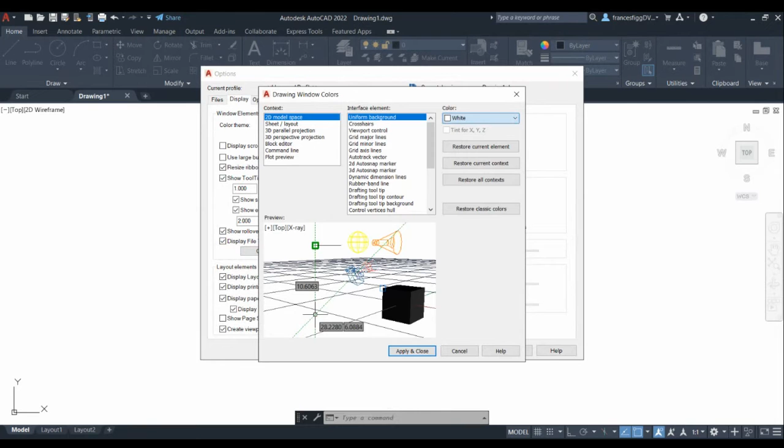I had already changed the background color, so I have that correct. I'm going to get rid of the grid, but if you forget how to do that, type in options and then go to display colors. It usually defaults to black, and I like white. So say apply and close, and you say okay.

The next thing you have to do is type in units, and you want to go from decimal to architectural. If it doesn't show up in feet and inches, you know you're in decimal. So when I go to draw a line, I'll see it in feet and inches.

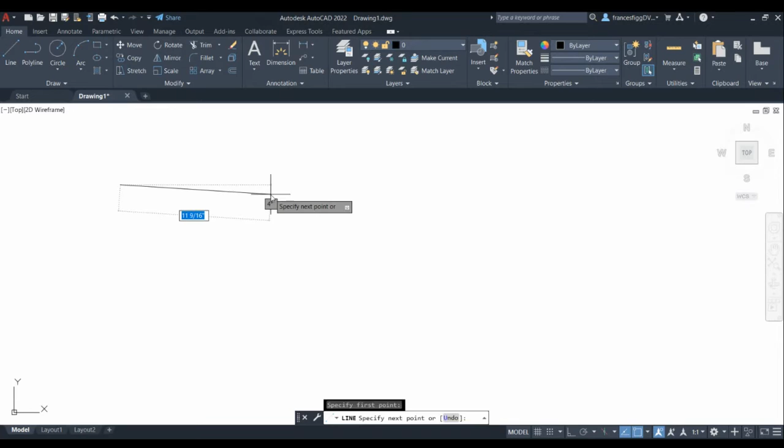Our first exercise is to draw a line that's 12 inches long. I want to make sure my ortho key is on, and I do that by typing the F8 key, or Control F8 if I am on the school computer or laptop. I want it to be 12 inches, so just type in 12. I don't need to write feet or inches; it will recognize it as inches. Then I hit escape, and I can double check my measurements, and I see that I'm 1 foot, which is the same as 12 inches.

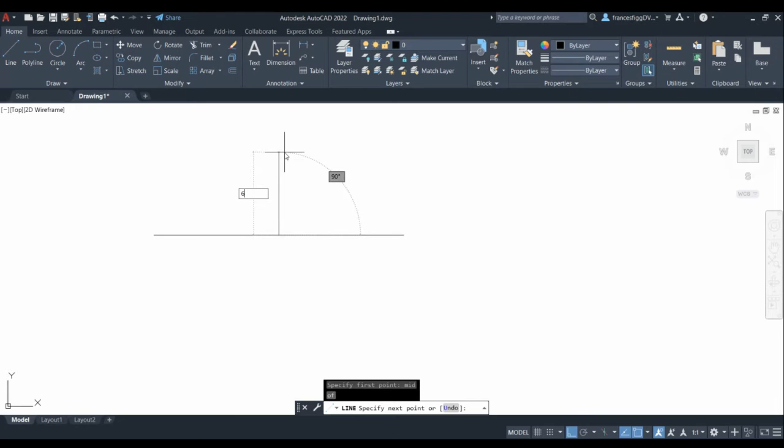Then I want to draw a line from the midpoint, and I have my ortho on. You can also look down here: here's ortho on, here's object snap on, snap to 2D reference point. But I want to do it from the midpoint, so if I type in MID, a triangle will come and I'll know I'm drawing straight from the midpoint. If I go up 6 inches and then hit enter, I've got a line that's 6 inches high. Again, check yourself — you can come check your measurements.

Now I want to extend that line. I want a 6-inch line down at the other end. There are 2 ways to do that. I can draw another line — it will recognize the end point of that 6-inch line, and I can draw 6 inches down. But what I've got is one 12-inch line and two 6-inch lines. I want this to be two 12-inch lines, so I can highlight those and type in join. And join — I've got two 12-inch lines.

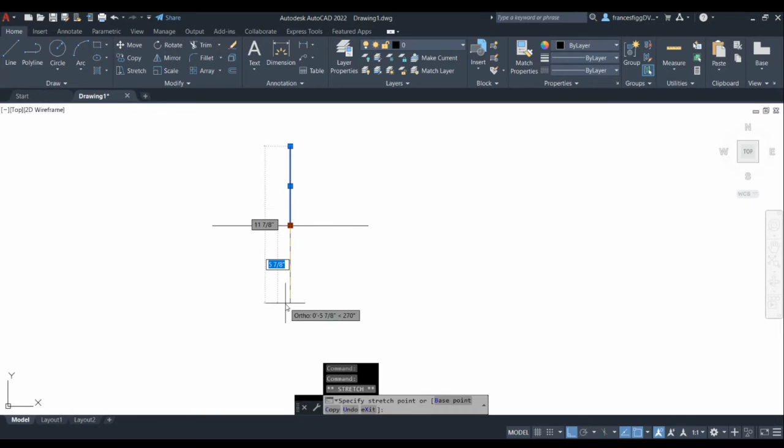There's another way to do it that's probably a little bit easier. Just click that 6-inch line, grab the end bar, and pull down 6 inches. I have to make sure that ortho is on, and I did 6 feet — I'll come and pull down 6. Now I've got a 12-inch line at the top and a 12-inch line at the bottom.

I want you to put a 10-inch circle inscribed at the center point, and it's asking for radius or diameter. So if it's on radius, I need to type in 5 to get a 10-inch circle. Return. Now it will ask me — the last command I just did was a circle — if I hit return, I get that same command coming up again.

I want you to draw another circle at that center point, but this time I want the diameter to be 2 inches. That didn't work — go here. The radius is 5, so we want a 1-inch radius on there. I've got a little circle at the intersection point of the large circle in that cross.

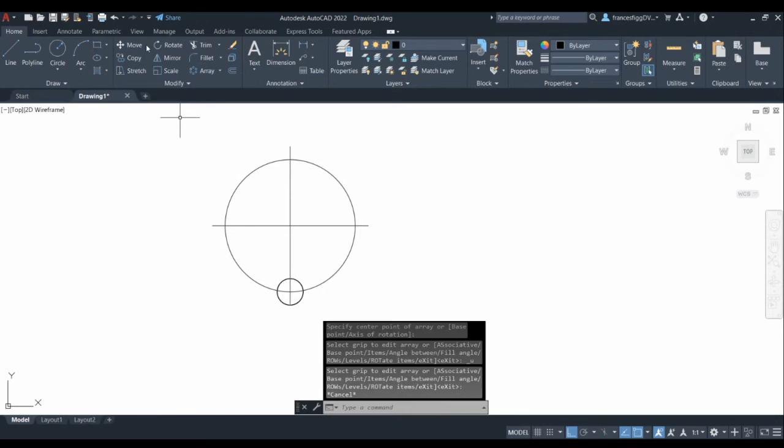Then we have this tool called array up here. There's a rectangular array, path array, or polar array. I'm going to click on polar array, select the object, hit return. It's asking for the center point, which I'll make the center of that cross, and I've got 6 items on there. I can play with this — I can go up to 8, I can go up to 88.

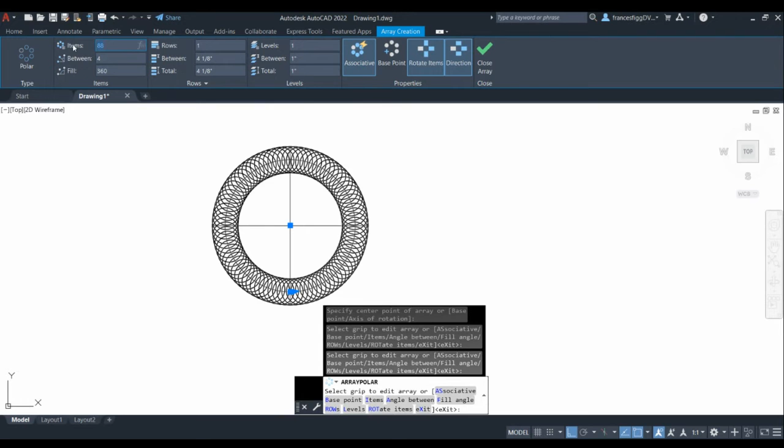Play with how that looks. It looks sort of like a spirograph. So I want to go back to 6 or 8 and then leave that. So that's our polar array.

And then I close the array. This all acts as one unit. I can at any time click that open, and it opens up the array again, and I can adjust what I've got there.

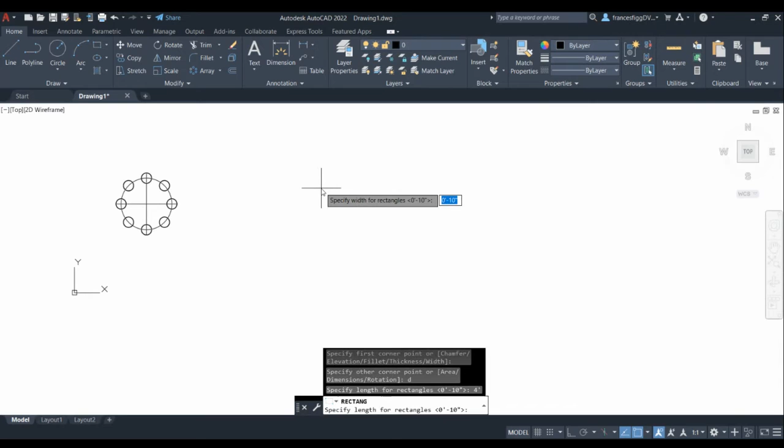Next I want you to draw a rectangle that is 4 feet wide by 2 feet deep. You can do that using either the rectangle tool or the line tool. If I come over here, I just type in D, I start going in the direction I want. The length I want is 4 feet, the height is 2 feet. So now, before I even click on it, I've got a 4 foot by 2 foot rectangle. I could have done that with the line commands, but it would take a lot longer.

Now I want to go back to this array and do a rectangular array. It's going to ask me to pick my objects, and it automatically gave me a 3 by 4 array, which is what I'd like you to have. You can play with the distance between the arrays.

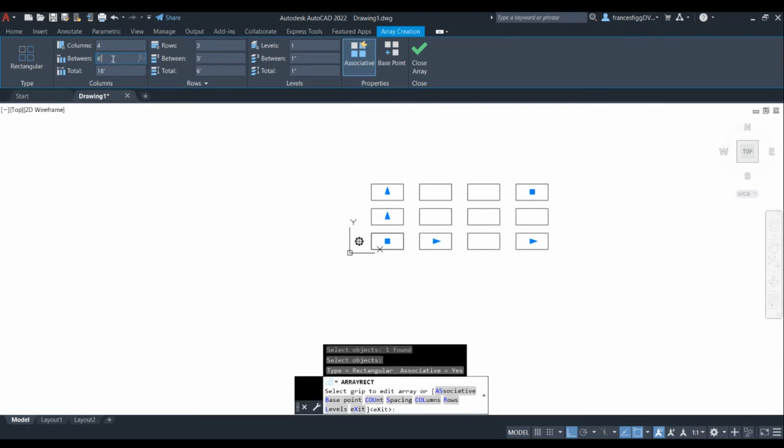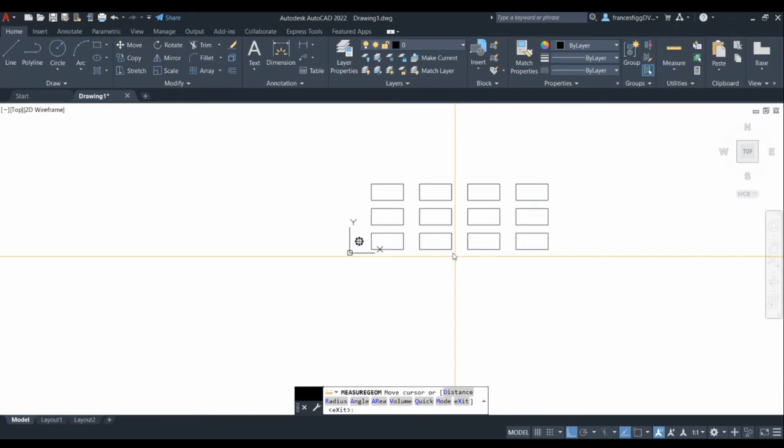You'll see that some will make it really close together, some will make it farther apart. What I want you to do is make sure that the array has a distance of 30 inches in this direction and this direction. Right now it's 1 foot there and 2 feet there. So I want you to figure out how to do that.

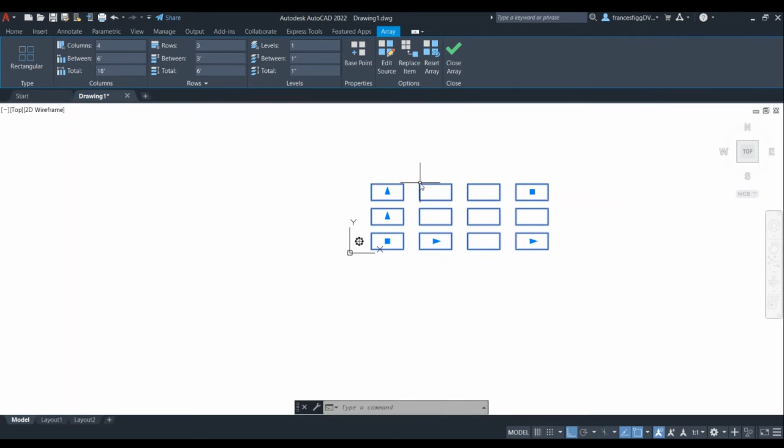I'm not going to give away the answer to that. There's a couple different ways to do it. All you have to do is click on the array and play with this between. It will give you a hint. The between is not the number here, it's the number from here to here. So I'll let you play with that and come up with 30-inch spacing on it.

All right, our next part is to learn how to use the mirror command. So we're going to draw a triangle using the line command. Make sure your ortho is on. You can tell by this little lighted up button down here. I want to come down 2 feet and over 1 foot.

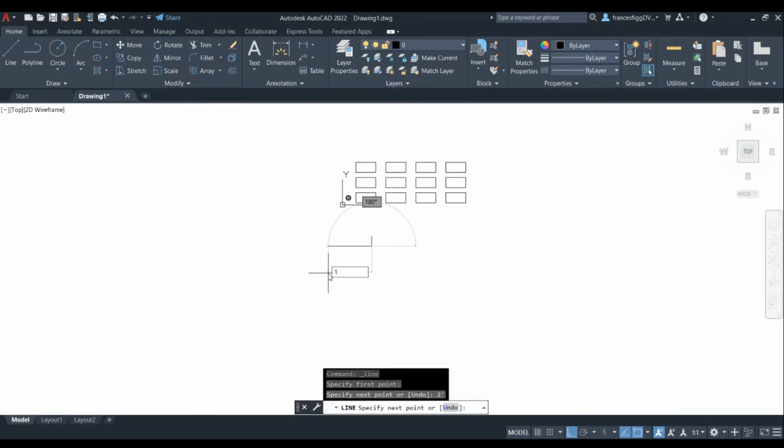And then I need to turn off ortho so that I can close that. If I don't turn off ortho, I won't be able to close the triangle. So now I've got a triangle.

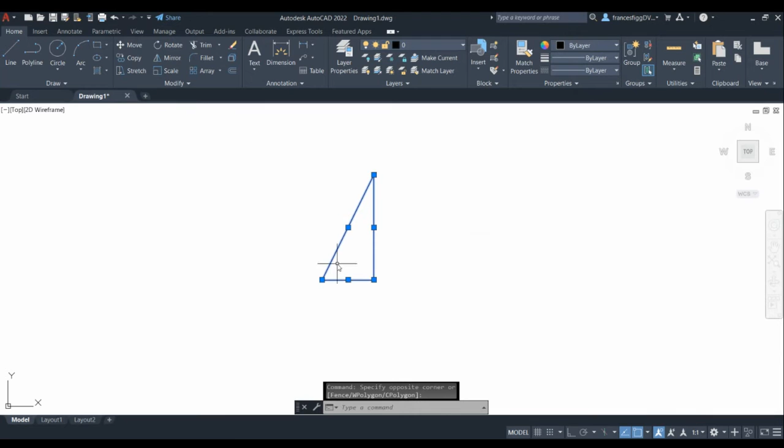Hit the escape key. Here's a mirror key up here. It's got 2 triangles side by side, so we're going to create a mirror of that triangle. So I choose the triangle,

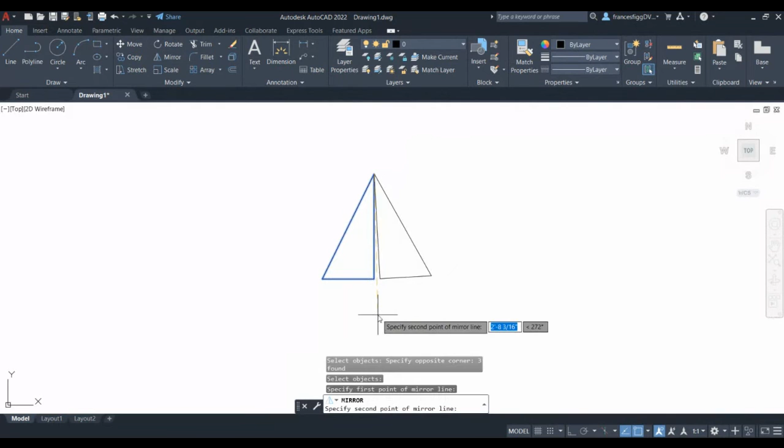and it says specify, and then I specify the opposite corner. I'm going to mirror, choose the triangle. I've selected the objects. Now select the first point and then the second point. And this is where I want my ortho back on. I can go turn it on or use the F8 key and add it back on.

Do I want to erase my source object, the one I started with? I say no. But if I go in here, if I delete this line, you'll see that there's a line below it because I have 2 lines there.

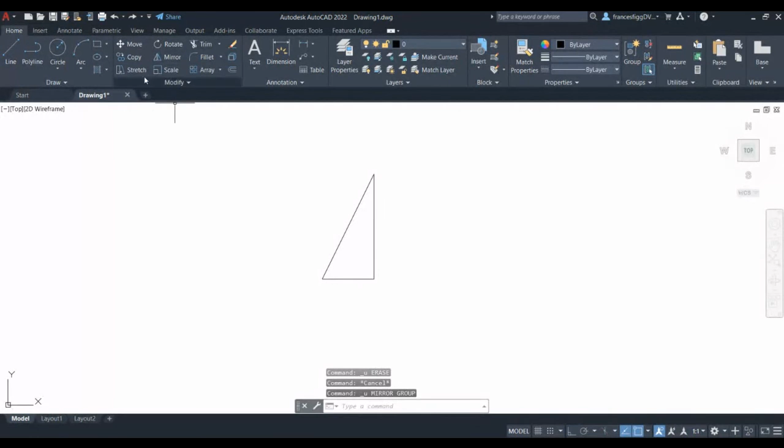So let me mirror this again. Turn the ortho key on, hit return. So what I could do is I know I have 2 lines there because I put the triangles right on top of each other, but you might not know that.

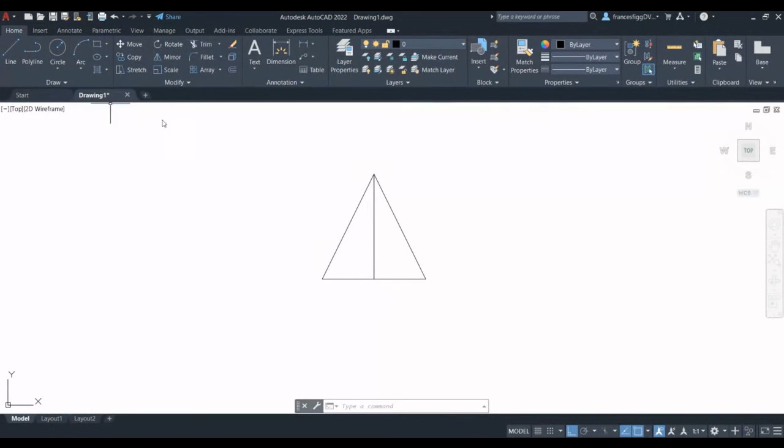So there's a command called overkill, which will find lines that are directly on top of each other. So I click the lines to overkill, and I'm looking for optimize segments. That means I could optimize pieces within a line or combine when objects align end to end. So I say OK, and you'll see it said 1 duplicate deleted, 1 overlapping object or segment deleted. So they have combined them, and now this is not 2 separate lines, there's only 1 line here.

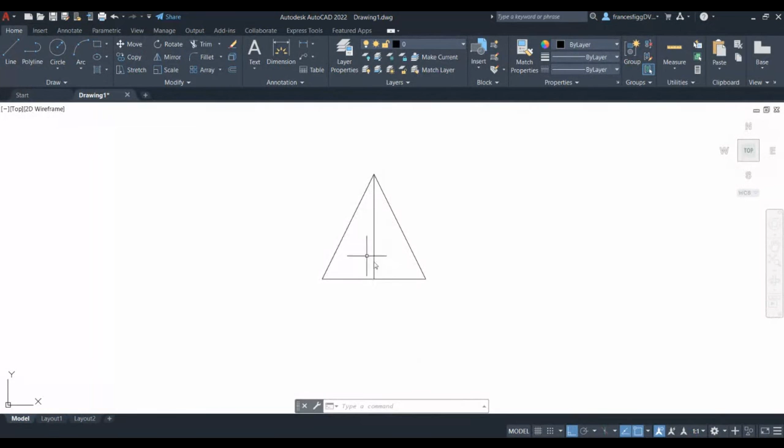So if I wanted to just get rid of the one line, I would just highlight that area right there and not the bottom. So that's part 3.

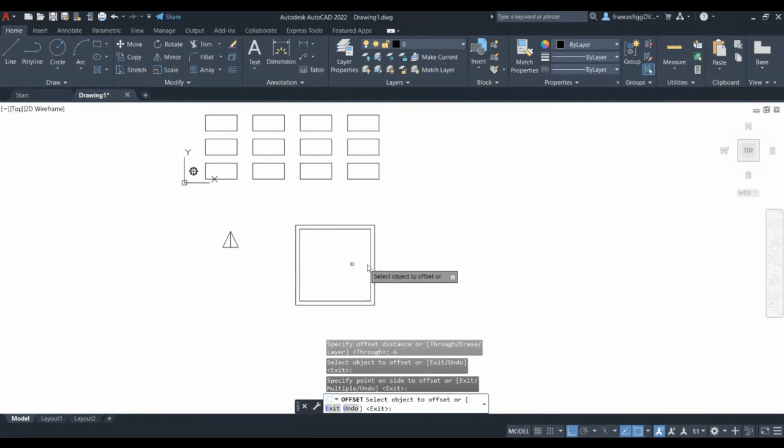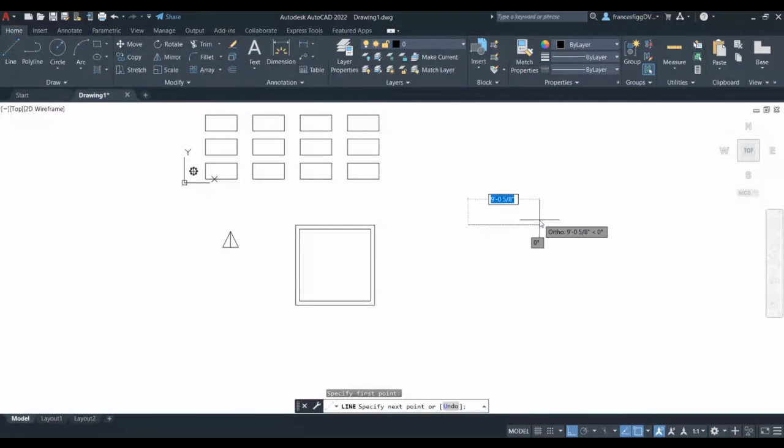And then I'm going to draw another rectangle using the line command that's 10 feet by 10 feet. I'm going over, grabbing that right edge, so when I draw the line it'll be perfectly aligned. I'm going to come over 10 feet, down 10 feet, over 10 feet, or I could have aligned with the top one and come up and close that.

So this line right here is 2 separate lines, 2 separate polylines. This is 4 lines. So when I offset this one, if I offset it 6 inches, what I'm going to have is the lines crossing over in the corners.

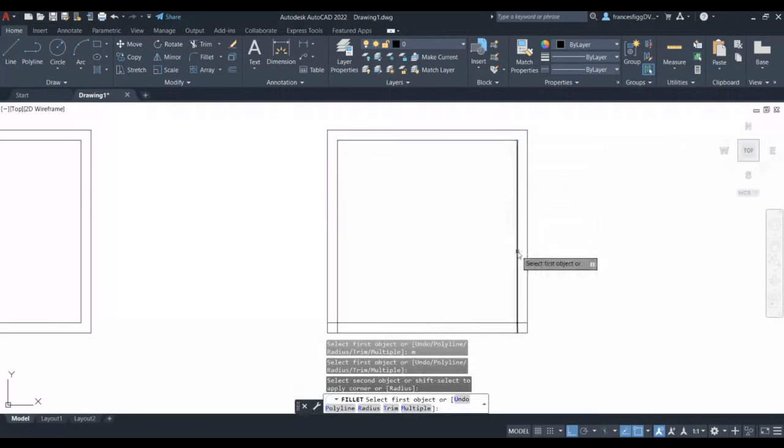So I can go up to that corner and trim it pretty quickly. Or even quicker, I can do a fillet and pick my radius at 0. And then I say multiple, which lets me do fillet over and over again at that radius, and then I can just come and close off each one.

So this is 2 lines. This one is 8 lines.

Now I want to stretch this. So if I stretch this, I have to pick the whole object. Because these are polylines, I either have to pick the whole object coming from this direction or from this direction. I'll come this way, and I can stretch this 24, or 2 feet.

For this one, if I stretch and just pick that end right there and say stretch 24, I end up with a break, which I'd have to reconnect. If I do the stretch command and grab from left to right, I've grabbed these upper and lower walls, and I hit stretch again, do 24, and I've got it set.

So now you'll see this is still 2 lines and this is 8 lines. Now what I want to do is draw an opening that is centered on this wall, that is 3 feet wide.

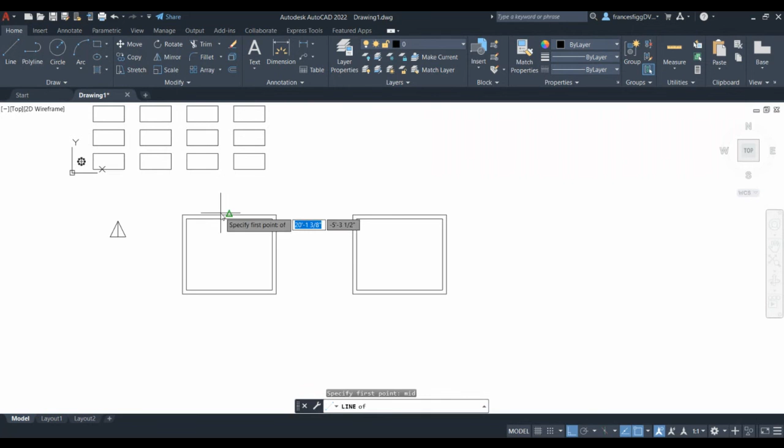So there's a couple ways to do that. One is I could type in midpoint and find the midpoint. We'll go to line, type in mid, find the midpoint of that line, and bring a line down, and then offset it 18 inches, because 3 feet is 36, and half of 36 is 18. And then I would just come and trim this.

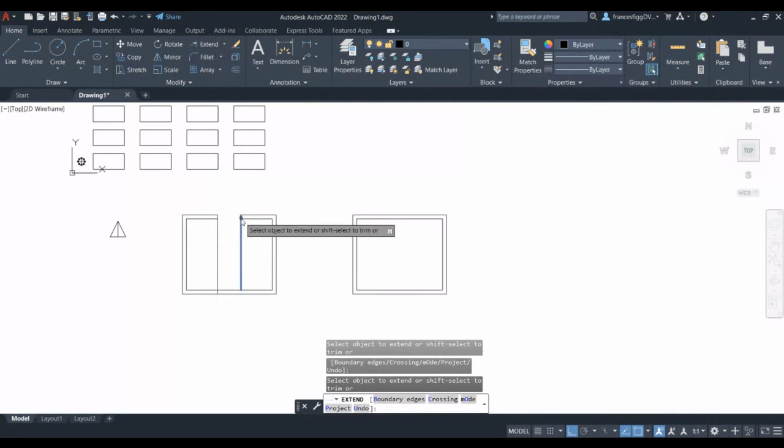Then I want to mirror this down at the bottom, or create another opening at the bottom. I could repeat what I just did, or I could extend. Below the trim is the extend button. I could extend those lines down and then trim again. Or, I'm going to undo that.

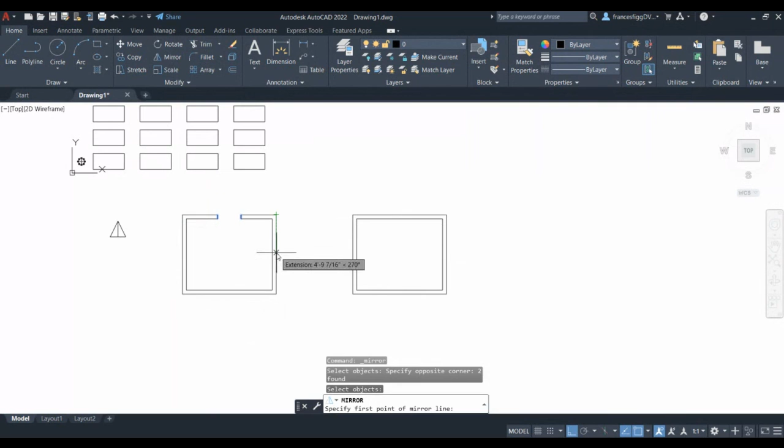I could use the mirror command. I could take and mirror, going from left to right, so I'm only selecting the 2 pieces that define the opening. I select the objects, and always look at the bottom, it's telling you what it's looking for. I hit return. I want to pick the midpoint, so it's perfectly centered on the bottom, and I come over straight. Delete the source object? No. And then I trim that out.

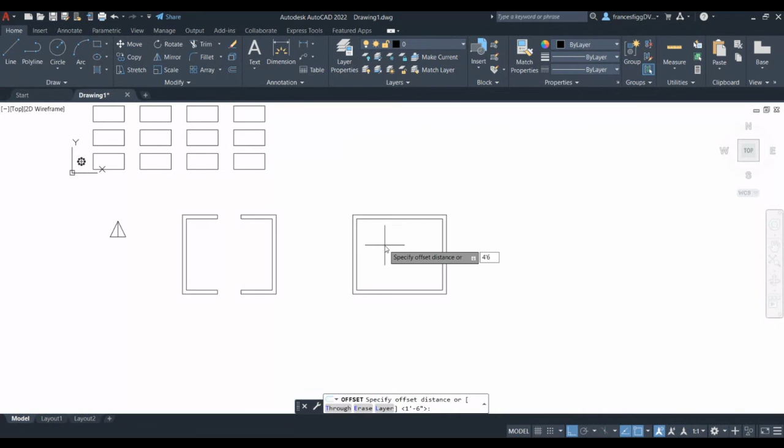So on this one, what I'm going to do is a little math. If you don't want to go to the midpoint, I know the midpoint is at 6 feet. I want to come 1.5 feet over to the left and right of the midpoint, so I want to go 4.5 feet from this point right here. So I'm going to offset 4 feet 6, I don't need to put 6 inches in. Over, and offset both those, then I can trim them out.

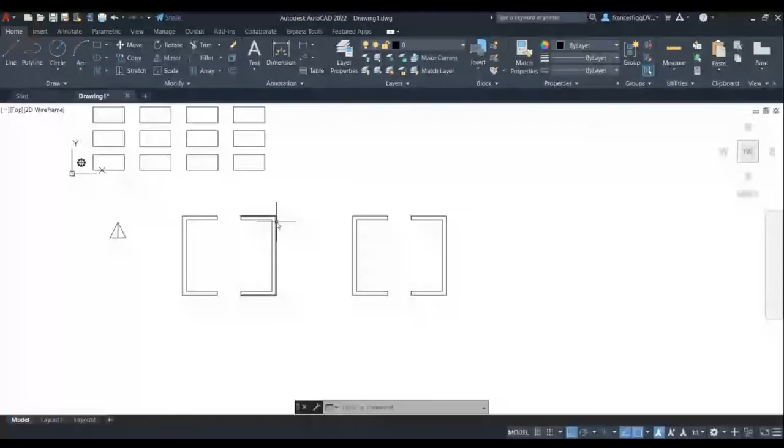And voila. Now they look the same, and they actually are the same, except this is a polyline on the outside, and this is all individual lines. So you might want to note that I wouldn't have been able to offset this 4.5 feet - it wouldn't have worked because it's looking at a continuous line.

So again, I could take this line and explode it - highlight the whole thing, EXPLODE - and now this is all individual lines, just like this.